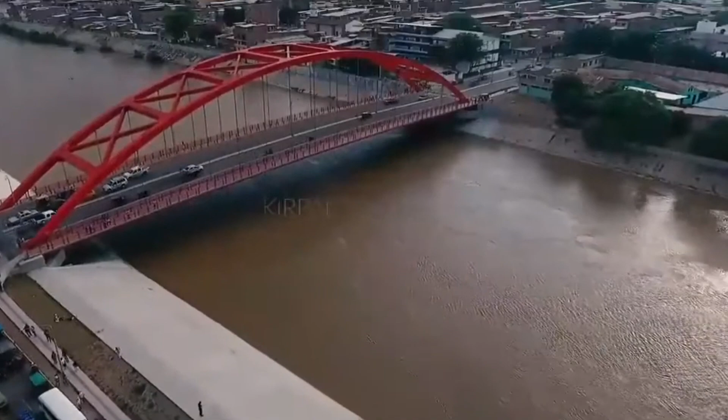In this first video, we will talk about breakages of levees and a description of the affected areas. In a second video, we will talk about the evaluation of the right and left levees. And finally, in a third video, we will tell you about the technical solution at the conceptual level that can be carried out to solve the pressing problems around the system that depend on the river. Without further ado, let's begin.

Dike breakages in Bajo Piura. Between 1972 and 1973, floods occurred in Piura due to an extraordinary event of El Niño, and breakages were recorded in medium-sized dikes that were reinforced around 1976.

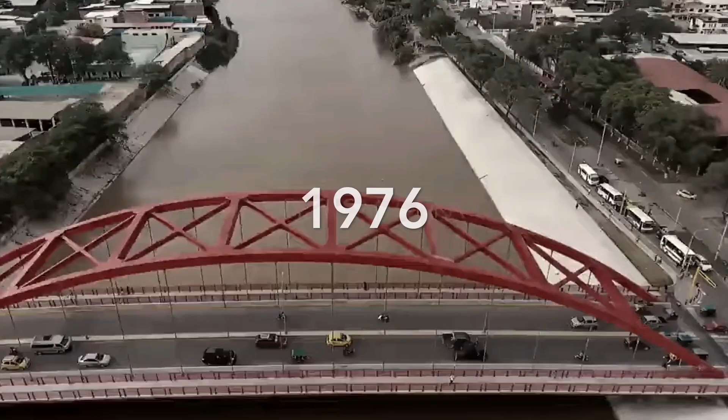With the planning of the Piura project and its first phase later around 1979, in order to reduce the risk of flooding in the irrigation areas and in the population settled along the Bajo Piura route, these dikes in the Bajo Piura flood defense system were lengthened, and for this reason they show some singularities in the plan of the current alignment of the Piura River.

With the start of the second stage of the Piura project, between 1981 and 1985, the current channeling dams were built with a distance between them of 500 to 800 meters. The phenomenon El Niño makes its appearance between 1982 and 1983; ruptures and the total destruction of approximately 15 kilometers of dikes occurred, in addition to the erosion of the banks and the significant length of the river on the banks of the city.

Around 1986, the dikes were rebuilt, providing them with adequate protection against scour by riprap toe protection and groins, since the phenomenon of scour or local erosion has been the main cause of failure. Between 1997 and 1998, the phenomenon El Niño made its appearance again with the rupture of the left dike 0.5 kilometers upstream and the Dren Alcantarilla 1308, in addition to the loss of 3 important bridges.

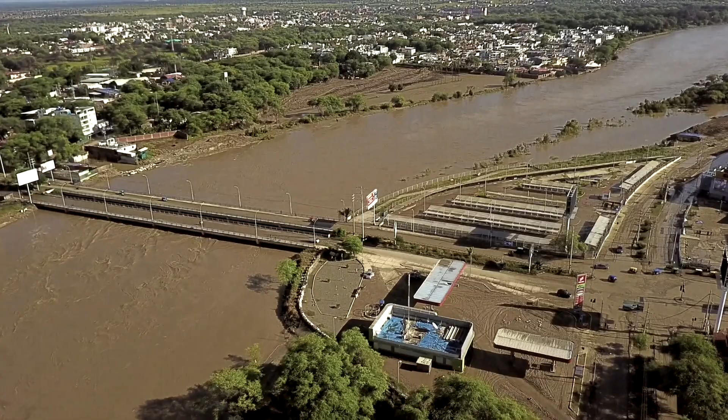Between the year 2000 and 2001, an evaluation of the defense system against floods in the Piura River was carried out. During the months of February and March 2017, in the Piura region, there were significant rains due to the phenomenon El Niño Costero. This precipitation caused various effects on the regional infrastructure due to rising rivers, activation of streams and flooding in populated centers.

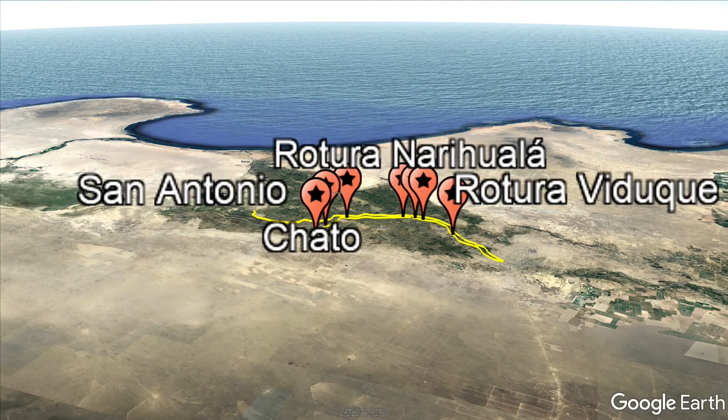On March the 27th, 2017, the maximum flood occurred in the Piura River with a flow greater than 3,400 cubic meters per second. It was swollen to such an extent that the river overflowed, affecting the dikes in the Bajo Piura in different parts, causing flooding in the valley of the left margin of the Bajo Piura. After this event, it was possible to identify 6 breaks in the left dam, these being the critical points.

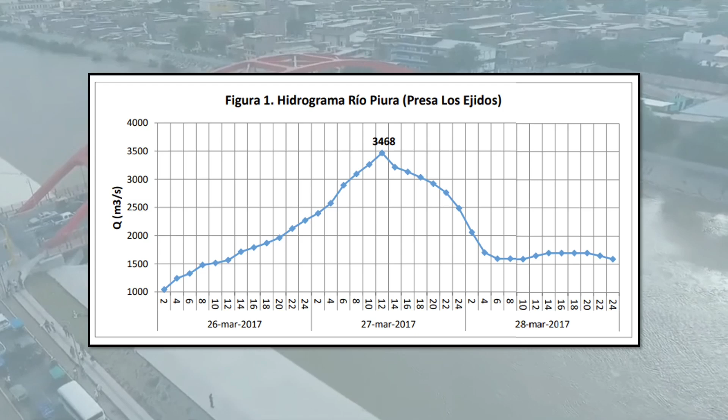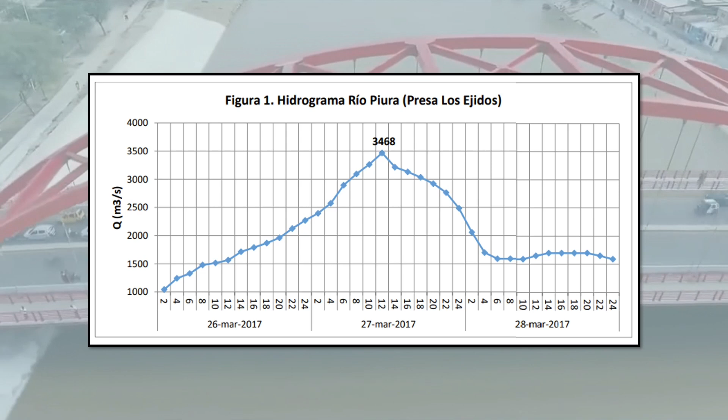This figure shows the hydrograph of the Piura River during the maximum flood of March 27, 2017, according to Proyecto Especial Chira-Piura hydrometeorology records. The progressive flooding since March 26 is clearly noticeable, with a peak flow of 3,468 cubic meters per second at 12 o'clock on March the 27th. After that, the decrease in flow can be seen, ending on March the 28th with 1,600 cubic meters per second.

Defense dam, description of the affected sectors. The defense dikes in the Bajo Piura along the river are works aimed at controlling the flow of the floods in the riverbed. For such quality, they are an essential component of the defense system of the valley against floods. According to the location of the Piura riverbed and the defended areas, 2 defense dams were built, one on the right bank and the other on the left bank of the river.

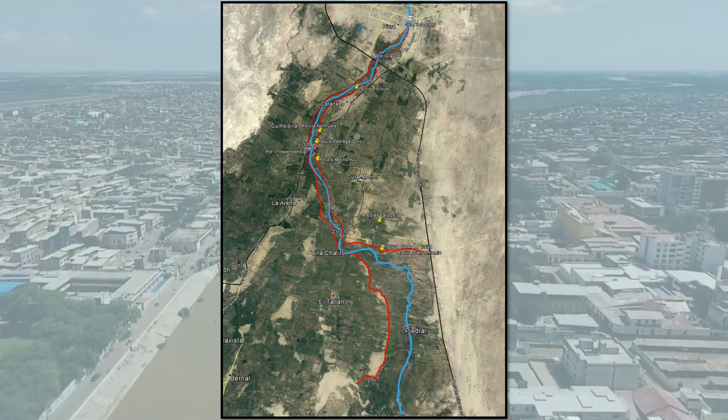The design flow for defense dikes has been evaluated and/or adapted in accordance with the value of the assets in the aforementioned areas that are protected against flooding, and in general it is not the same for the dikes, nor is the alignment for each of them. This image shows a Google Earth view of the Piura River in Bajo Piura.

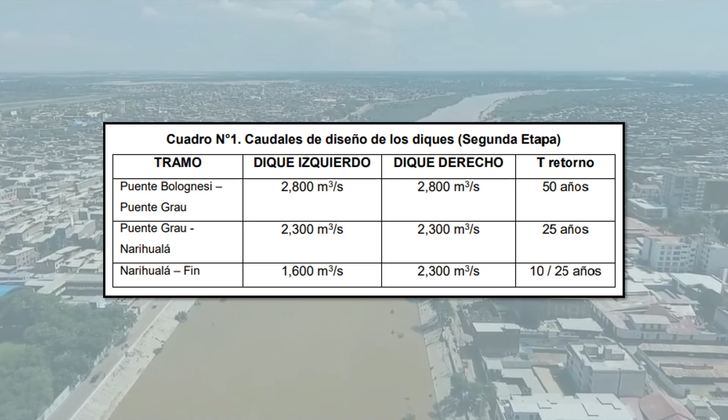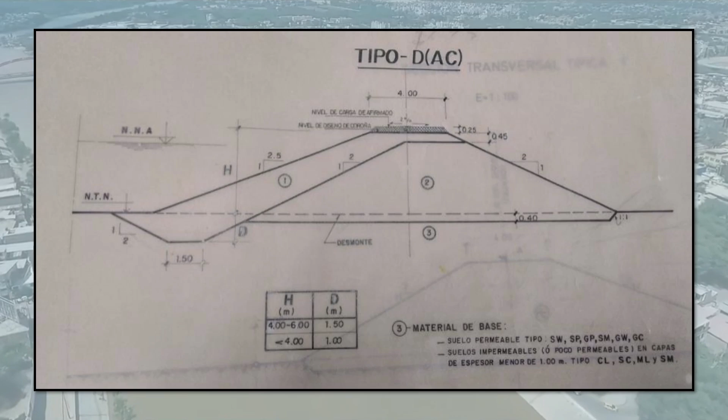Free edge 0.6 meters on one side and free edge of 0.90 meters on the other. Spillway capacity 1,400 cubic meters per second. In general, the typical cross-section of the defense dikes is of these dimensions.

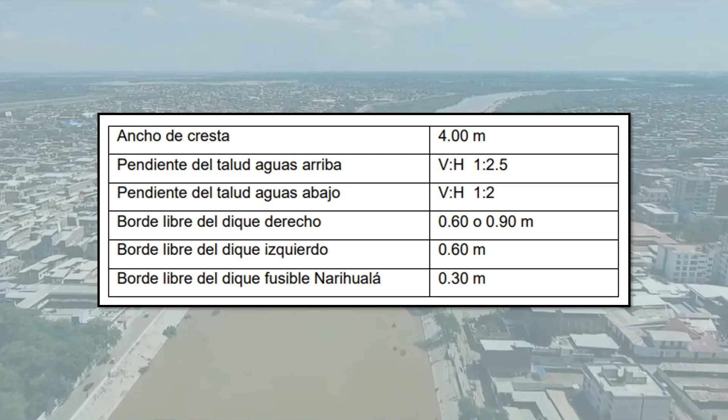In order to achieve the impermeability of the body of the dikes and to make the most of the available material, the body of the dike was made up of two parts: compacted fill with common material in the downstream part, and compacted fill with impermeable material on the water side.

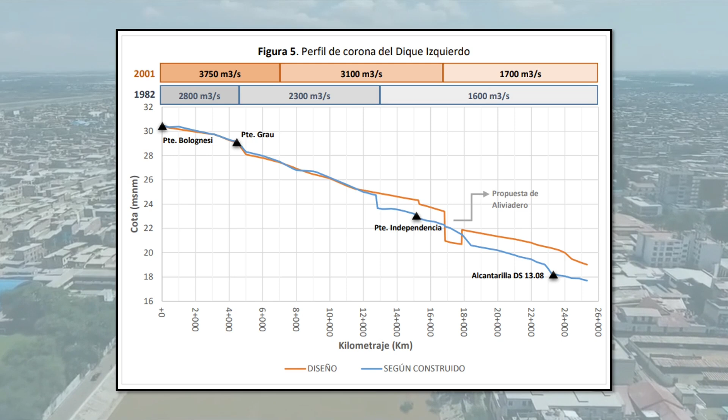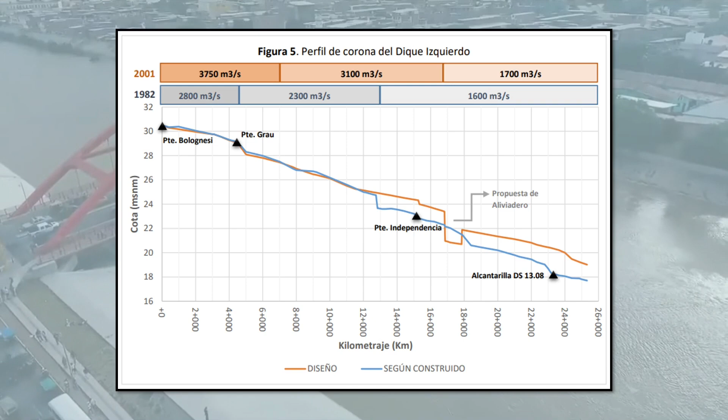This figure shows the profile of the crown of the left breakwater considering the design elevation and current construction. Accordingly, it can be seen that the study carried out in 2001 considered the Santa Rosa spillway at kilometer 17 to discharge the excess flow on the left bank of the valley. However, according to what is indicated on the plans and in the field, this spillway was never built.

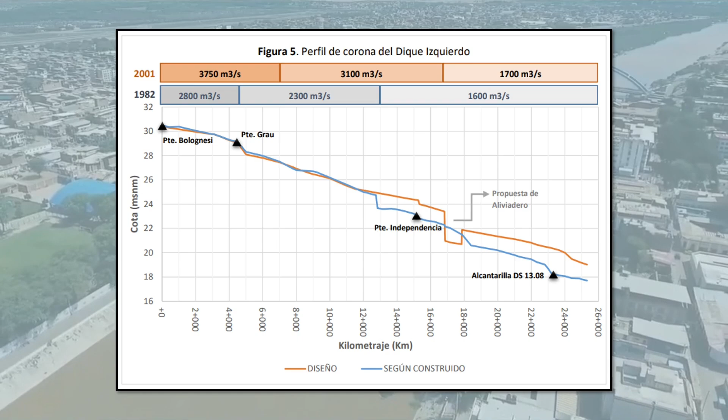Thus, it can also be seen that from kilometer 13, Narihualá, the level of the crown of the built dike is on average 1 meter below the design level of the study carried out. Breaks in the left dike. The left dike is located on the left bank of the Piura River.

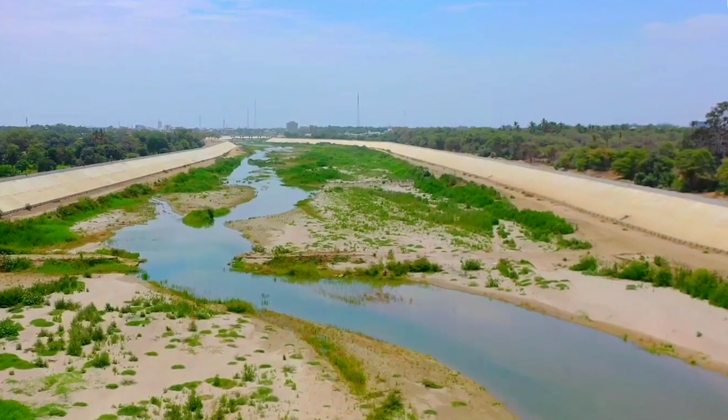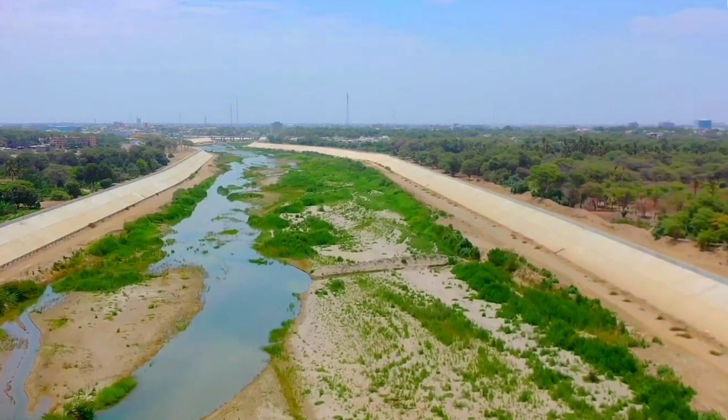The left dike has been the most affected riverside defense, given that the river overflowed in various sectors due to the flooding, surpassing the crown of the left dike. That is why there have been 6 significant ruptures, these being vulnerable areas where the flooding of a large part of the Bajo Piura Valley and its populated centers on the left margin began. At these points, the breaks of the left dike occurred.

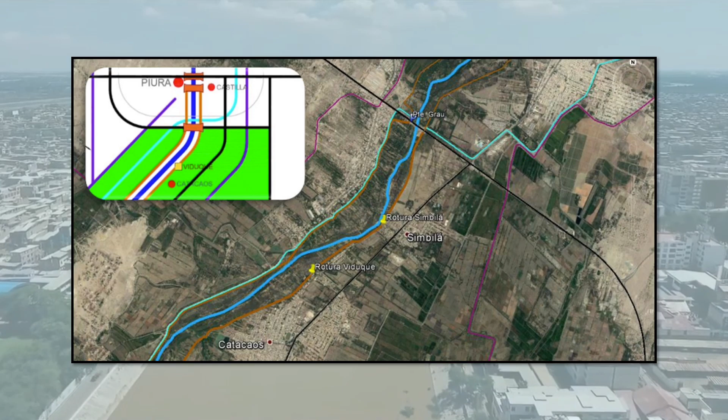The Viduque Break. The Viduque Break is located 3.3 kilometers downstream from the bridge, on the left bank in the Rancho restaurant area. This rupture affected residents and farmers of the town of Viduque, Catacaos, and Simbilá. In this sector, the separation between dikes is approximately 480 meters. This image shows the location of the Viduque Break. This photo shows the Viduque Break in the Rancho restaurant sector.

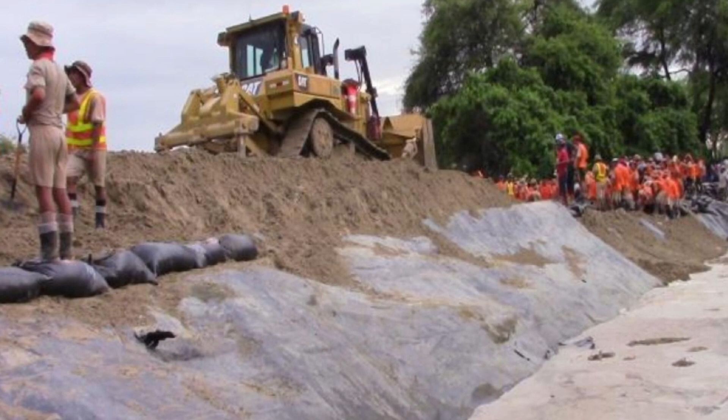This photo shows the emergency works: filling with own material, placement of bags and geomembrane, placement of rock on the slope downstream. According to the post-impact assessment, it was observed that the main riverbed of this area is about 200 meters from the dike. However, the flooding began in this sector. Likewise, it was observed that this is the lowest area of the crown of the dike in this section, which is why it represents a vulnerable point in the event of the river rising.

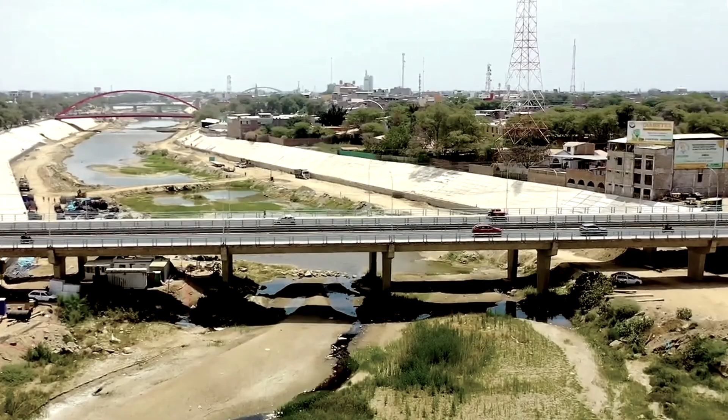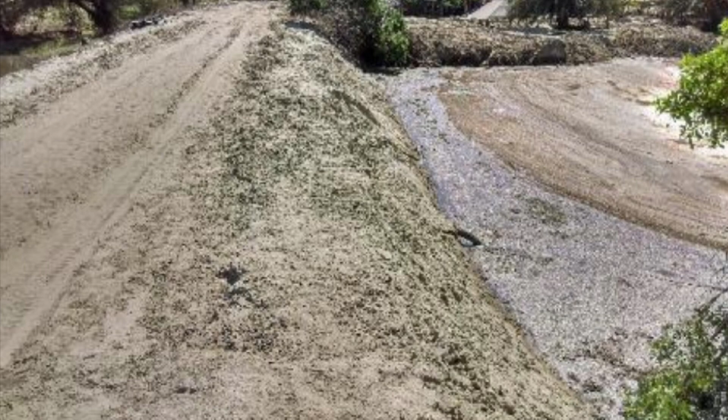The Narihualá Break. The Narihualá Break is located 1.9 kilometers upstream from the Independence Bridge on the left bank, about 150 meters from the Bajo Piura road. This rupture affected residents and farmers of the towns of Narihualá, Pedregal Chico, and Catacaos.

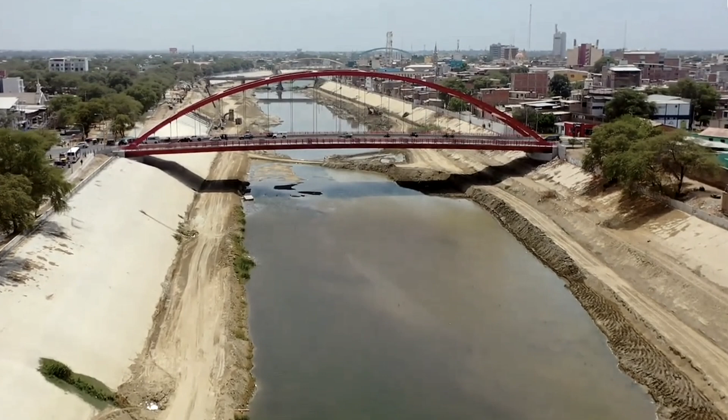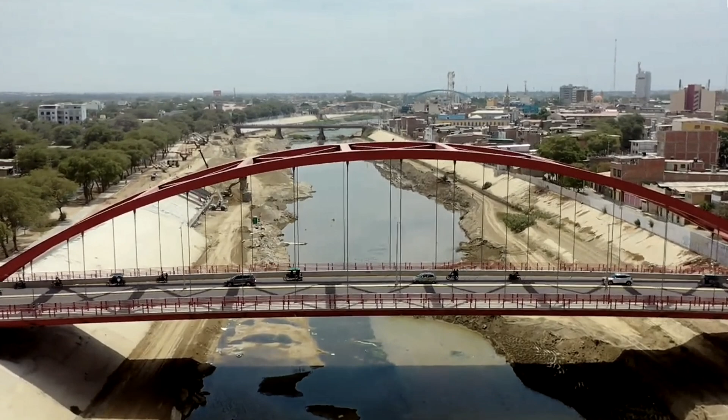The emergency works in this sector were carried out by refurbishing and filling the break zone with its own material close to the sector. Filling and shaping of the dike section was carried out. However, to carry out this closure, dike material from an affected sector was used, thus increasing the weakened area.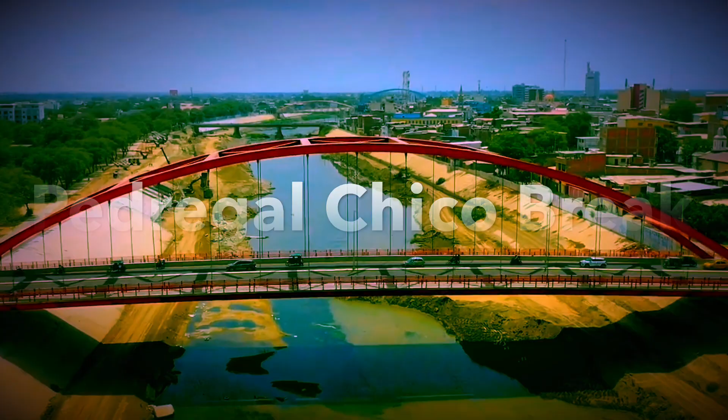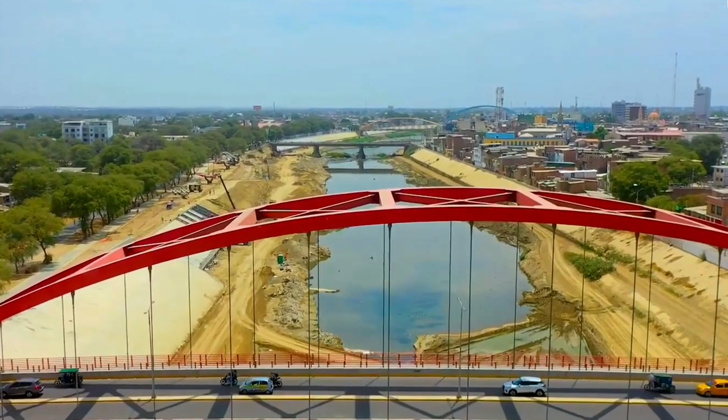Pedregal Chico Break. The Pedregal Chico Break, Sector Dos Animas, is located 700 meters upstream from the Independencia Bridge on the left bank next to the Bajo Piura highway. This break was the most important since it included the dam and the road. Residents and farmers in these districts of Catacaos and Cura Mori were affected, with the town of Pedregal Chico being the most affected. This photo shows the Pedregal Chico Break, Sector Dos Animas.

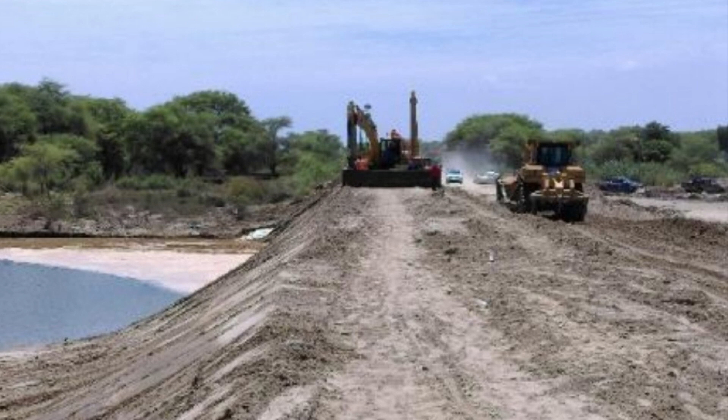This photo shows the emergency work carried out to close the breach, fill, and reshape the sections of the dike and road. This sector was treated as an emergency given its importance for communication and access to Bajo Piura. The necessary work was carried out to close the dam and reshape the temporary access road.

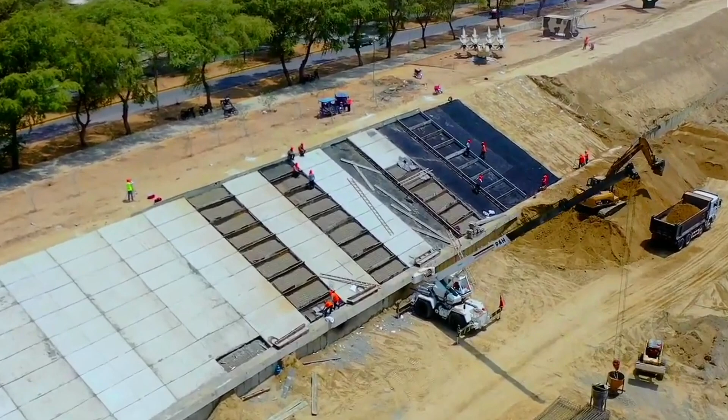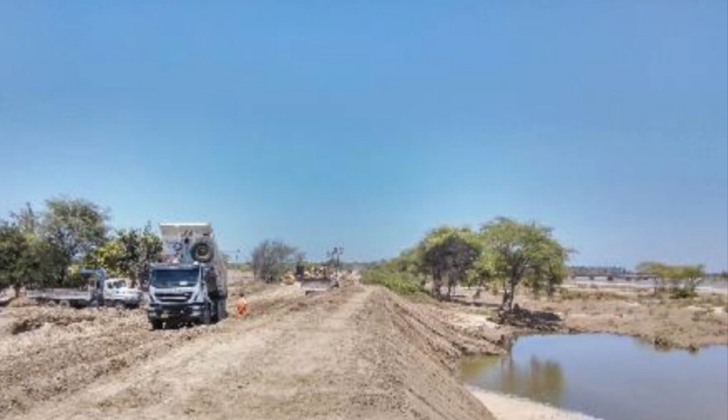It is necessary to mention that in this sector geobags were used as a protection on the embankment of the dike, thus seeking to mitigate the erosion process. This photo shows the emergency work carried out on the Pedregal Chico, Sector Dos Animas, to recover passability and the eroded section of the dike.

The Molino Azul Break. The Molino Azul Break is located 800 meters downstream from the Independencia Bridge on the left bank. Residents and farmers of Molino Azul, La Campiña, Pedregal Chico, Pedregal Alto, and Cucungará were affected. This photo shows the Molino Azul Break.

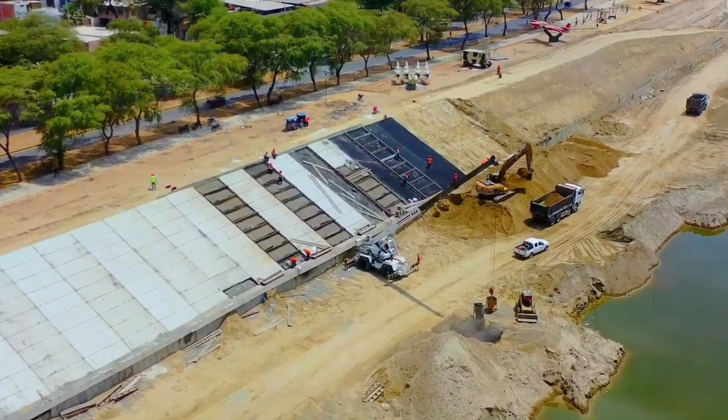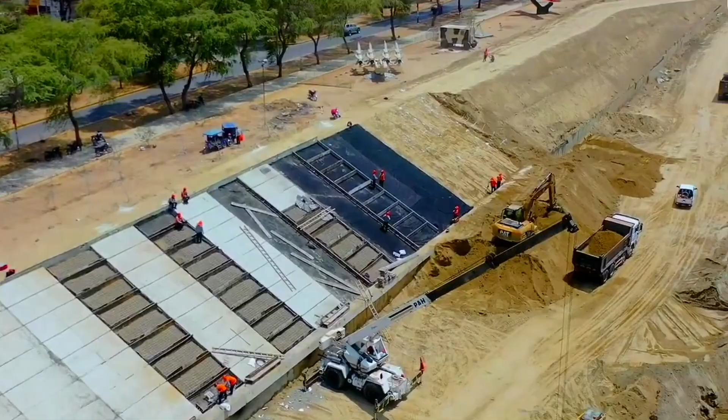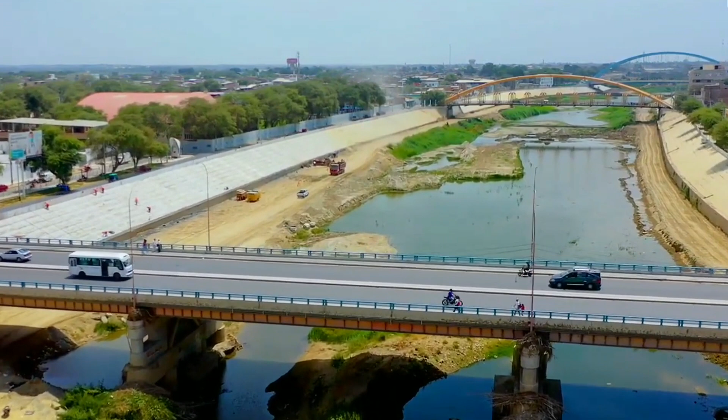This sector comprises a length of approximately 17 meters with water flowing around the dam. The failure zone was 11 meters deep at its most critical point, which gives an idea of the magnitude of the undermining of the dike in this sector. In turn, the dike in this entire section shows erosion on the slopes. The typical section has been reduced by more than 50%, weakening the entire riverside defense.

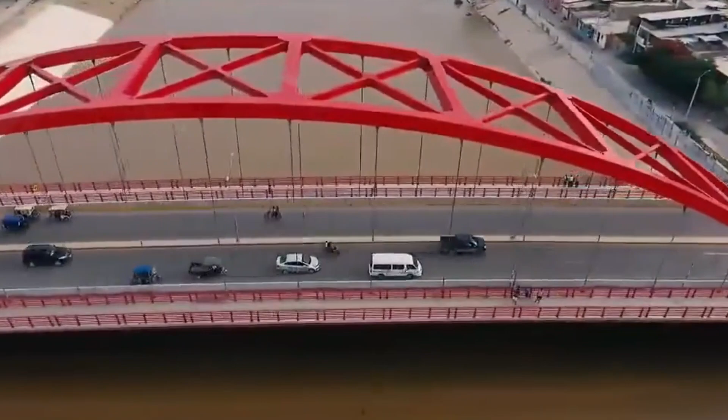Three ruptures occurred near the Independencia Bridge, Narihualá, Pedregal Chico, and Molino Azul, which are in sections less than 3 kilometers. It shows the impact the Independencia Bridge has had on the behavior of the river. Having a length less than the width of the channel, this is a strangulation of the section, generating higher speeds, being at the same time an obstacle influencing the backwater and increasing water levels upstream. This has generated local phenomena of sedimentation and erosion in sectors near the bridge.

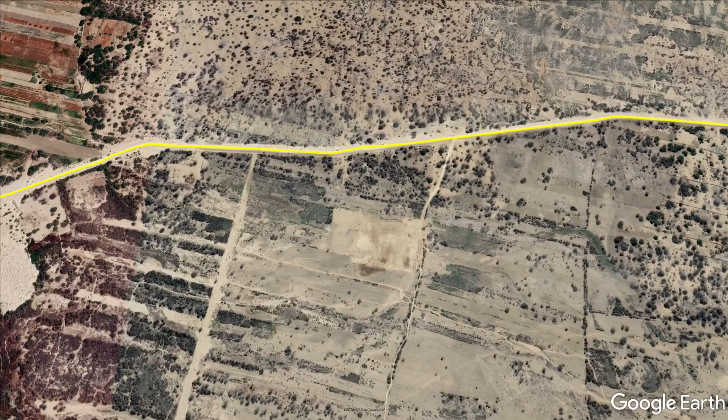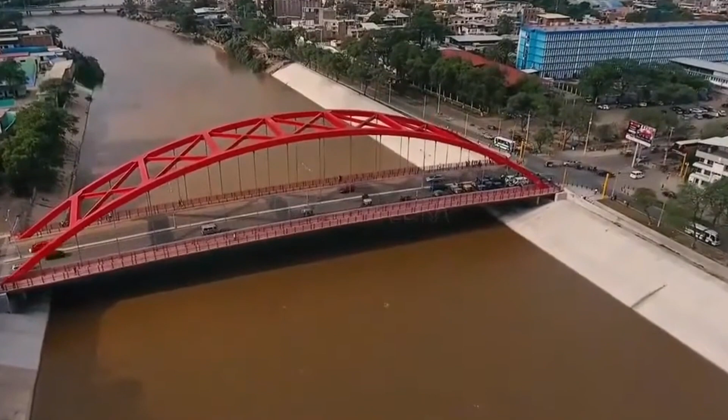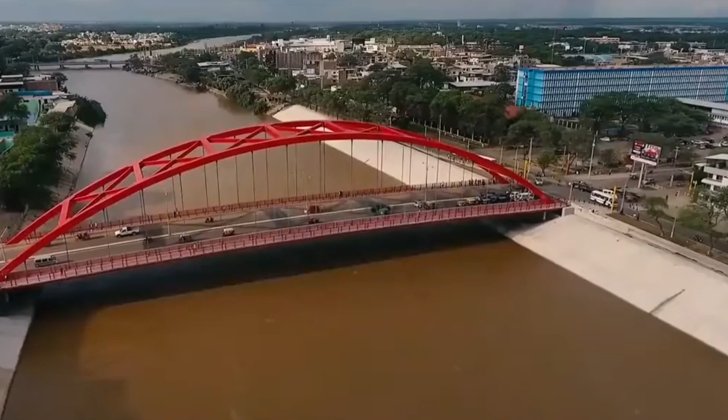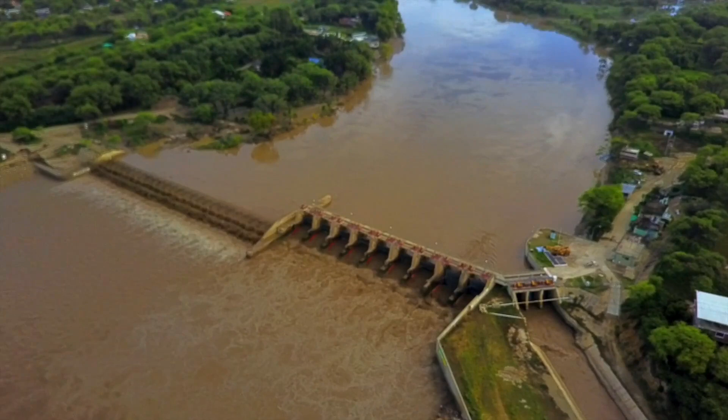This has been all for the moment. In the following video, we will talk about the evaluation of the right and left dikes and the affected areas.